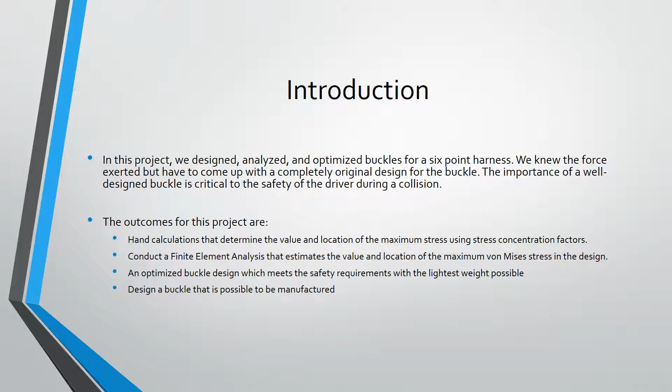These are the assumptions we made when designing our buckle. The forces are at the slot of the buckle and at the hole of the buckle in the opposite direction. The force is distributed equally to each buckle in the harness. The applied force is in tension uniaxially.

The buckle material is uniform throughout, or homogeneous. The material of the buckle is assumed to be brittle for hand calculations. The buckle does not experience any moments. The buckle is secured on both of its sides. The fillets on the buckle edges do not affect the stress distribution of the buckle, and the temperature is assumed to be ambient.

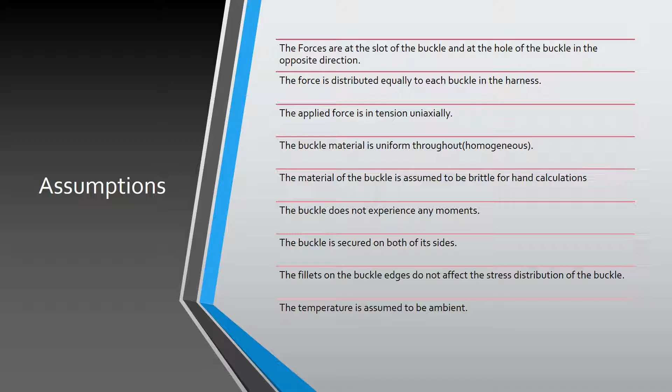This is our free body diagram. On the left, we have the force lines that go throughout our buckle design, and on the right, we have the initial dimensions that we have for our buckle.

It has a width of 2 inches, a height of 2 inches, and the hole towards the bottom has a diameter of 0.5 inches. The height of the slot is 0.5 inches and the width of the slot is 1 inch. We assume the thickness of the buckle to be 1/4 of an inch.

For our knowns, we know the dimensions because we assumed them. We know the material properties. We know the weight of the man was 200 pounds and the force he felt was 100 gravities. We know that the gravitational constant is 32.2 feet per second squared. And we knew the ultimate tensile strength was 138,000 psi, and as previously stated, the thickness was 1/4 inch.

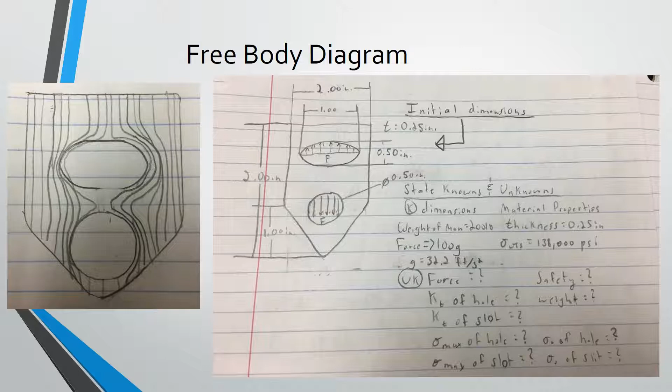Our unknowns were the force that was exerted on the buckle, the KT of the hole, the KT of the slot, the nominal stress of the hole, the nominal stress of the slot, the max stress of the hole, the max stress of the slot, the safety factor of our design, and the weight of the design.

These are the KT charts we used with our initial dimensions. On the left was for the hole, and on the right was for the slot.

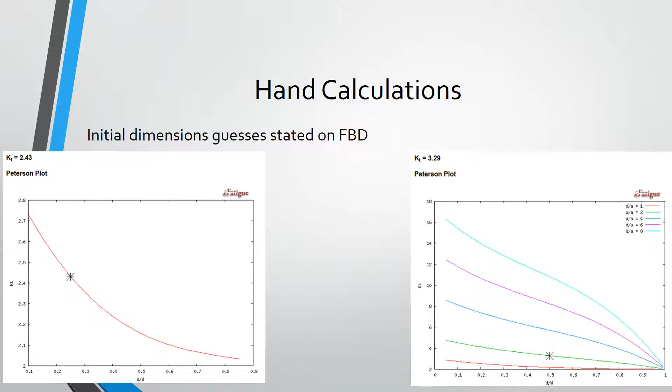These are the calculations we used. For equation 4, that was used to determine KT for the hole, and equation 8 was used to determine the KT of the slot. Equation 4 was also used to determine the slot.

On the right, those are areas of a rectangle, circle, ellipse, and triangle, and total area, so that we were able to determine the weight of the buckle.

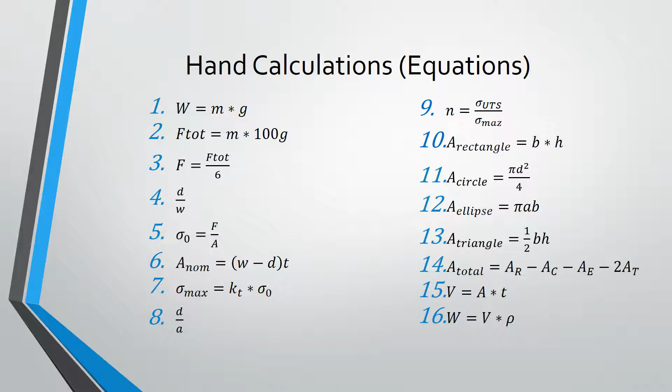For equations 1, 2, and 3, we used those to determine the force that would go to the buckle.

These are our hand calculations. The first step was to determine the force. We determined that the force was 200 pounds multiplied by 100 gravities, and we were able to divide that by the 6 buckles in the harness, so we were able to get a value of 3,333.33 pound force repeating. Next, we determined the max stress at the hole.

First we determined the KT value from the charts. Then we determined the nominal stress and used the area equation from the KT diagram. From there we got our final answer for the max stress at the hole.

Next, we determined the max stress at the slot, and we assumed the plate was an elliptic symmetric hole. We used the same equations from earlier for area and the same equation from earlier for the nominal stress, and then from that we determined our max stress.

Since this max stress was higher than the stress at the hole, this would be the max stress of the system. Then we determined the safety factor by dividing our ultimate tensile strength by our max stress, and we got a safety factor of 3.1, which is greater than 1.5.

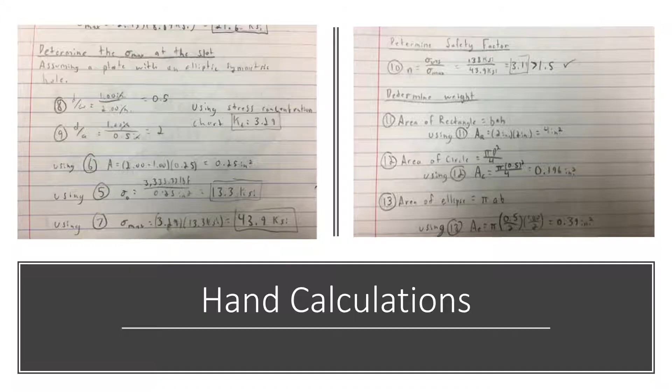Then we determined the weight by calculating the area of the buckle, and after we determined the total area, we multiplied it by the thickness to determine the volume, and then we multiplied that volume by the density of the material to determine the weight, which ended up being 0.096 pounds.

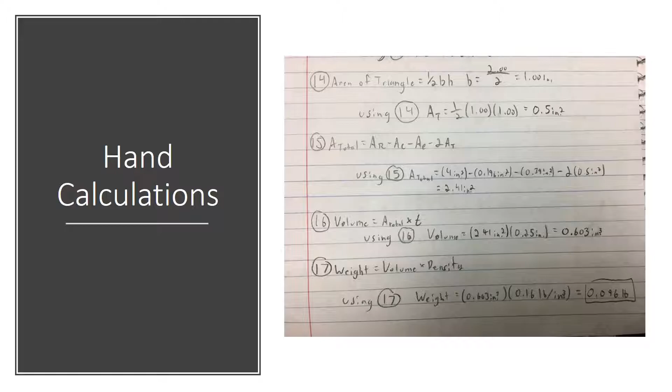To optimize the width and thickness of the buckle, we use the equations provided in the course website and plug them into Mathematica to simultaneously solve 7 equations and get the most optimized width and thickness.

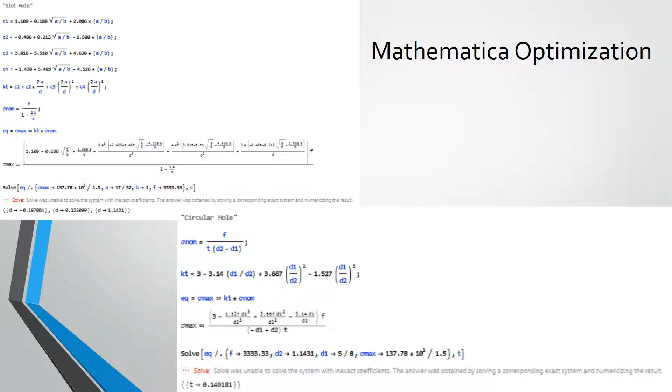The width of the buckle should be 1.14 inches, about 1 3/16, and the thickness should be 0.149 inches, about 3/16. After trial and error using standardized IPS dimensions, we modified our design to meet the safety factor and optimize it to the lightest weight possible.

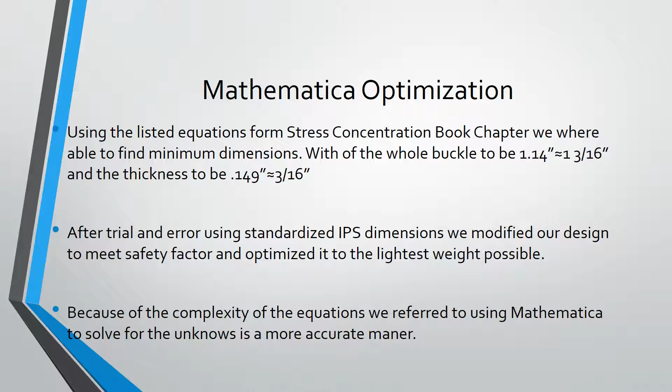Because of the complexity of the equations, we used Mathematica to solve for the unknowns in a more accurate manner. These are the graphs we found for KT using the optimized dimensions. The left is for the hole and the right is for the slot.

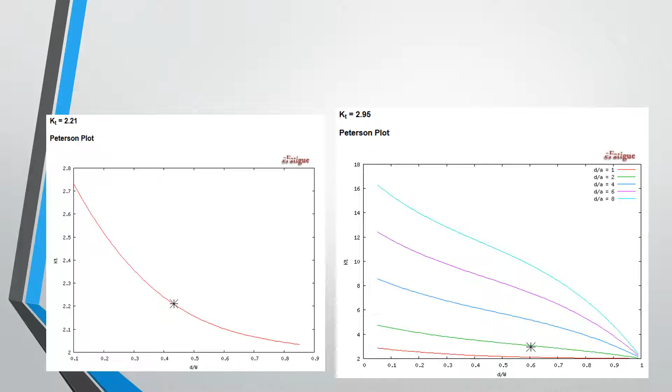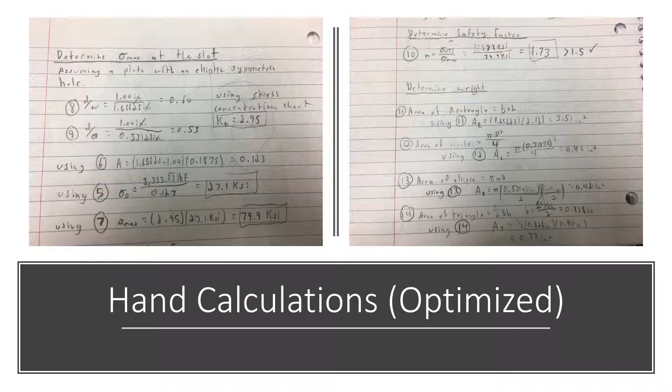Next, we determined the max stress at the slot, assuming a plate with an elliptic symmetric hole. We used the KT calculations given with the diagram for D over W and D over A, then determined the KT through the stress concentration chart. Using the same area and nominal stress equations as before, we found the max stress to be 79.9 KSI. Since this stress was higher than the stress at the hole, it is our max stress for the system.

Next, we determined the safety factor by dividing the ultimate tensile stress by our max stress, and found our safety factor to be 1.73, which is greater than 1.5.

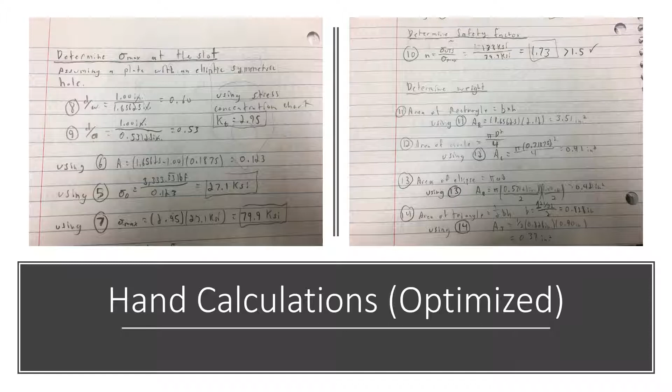Next, we determined our weight, first by calculating the area of our buckle. We added the areas to determine the total area, then multiplied it by our thickness, now 0.1875 inches, and multiplied the volume by our density, finding that our buckle weighed 0.058 pounds.

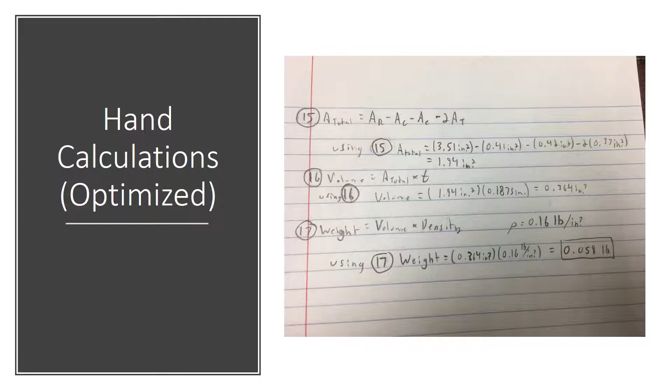After trial and error, this was the final dimensions for the most optimized buckle we could create.

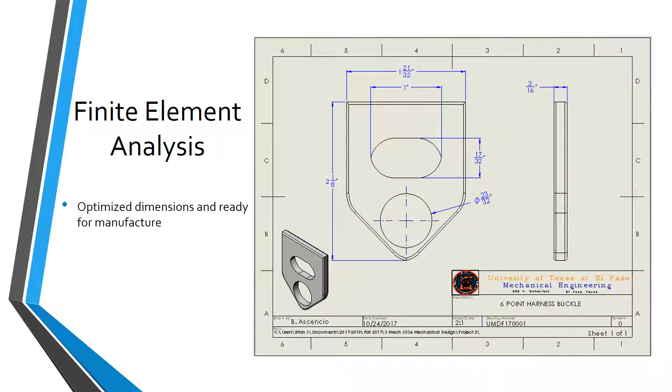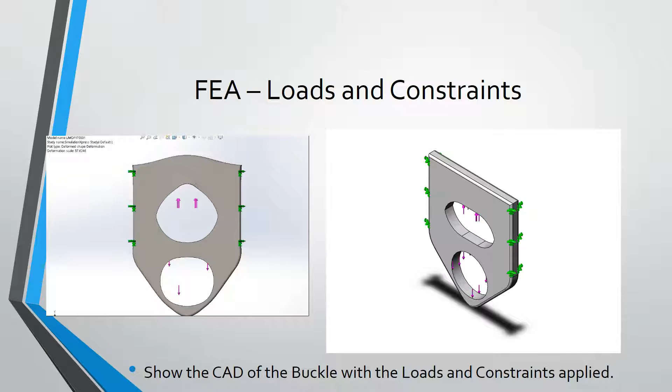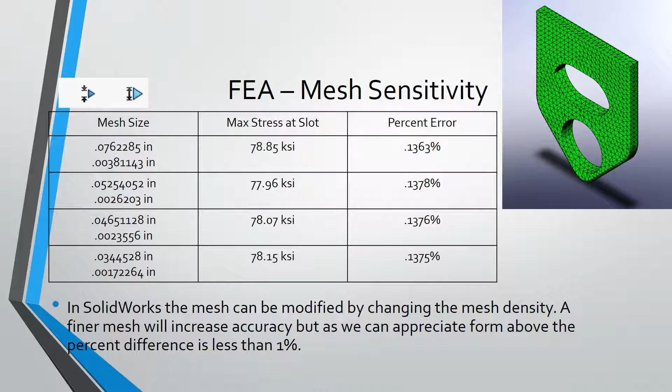Here we can see the heat map of the von Mises stress, with the max being 79.1 KSI and the min being 263 PSI.

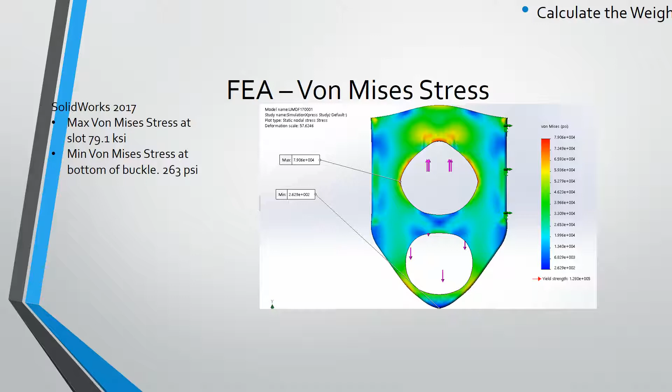As we assumed, where the larger discontinuities were, the larger the stress was. Comparing the FEA von Mises stress to the hand calculations, there was not a lot of percent error, and due to the simple geometry of our design, the values had a max error of 18.2%, making the hand calculations extremely accurate.

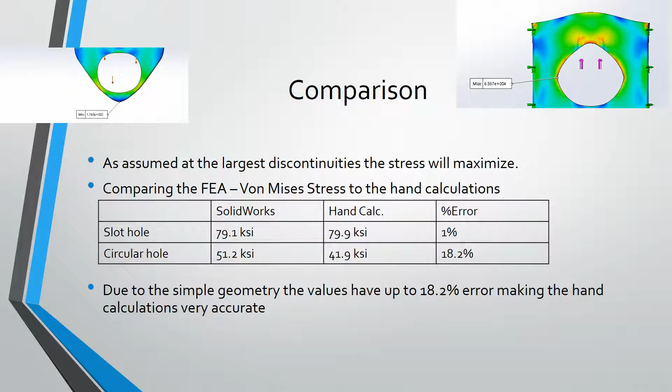Approximately, titanium costs $18.80 per pound. Already manufactured, it would cost $11.52 per piece.

Coming up with a practical, manufacturable design that could also withstand the force was the biggest challenge we faced during the design, as well as optimizing it to be as efficient and lightweight as possible. We first started with dimensions we believed would work, then optimized our design in relation to the provided equations. We then compared the FEAs of the various designs and chose the most efficient.

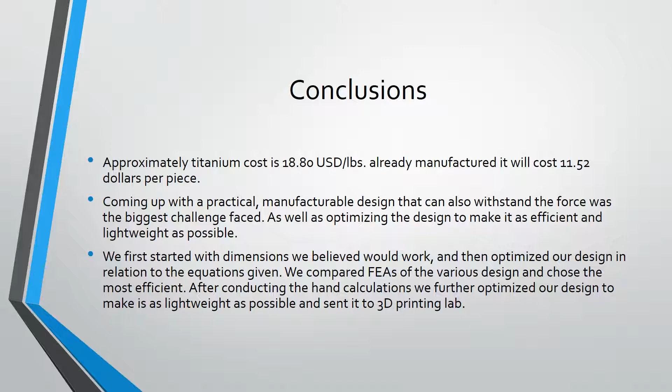After conducting the hand calculations, we further optimized our design to make it as lightweight as possible, and then sent it to the 3D printing lab.

SolidWorks has an optimization feature. After viewing and reviewing the results, you will be asked if you would like to optimize your model.

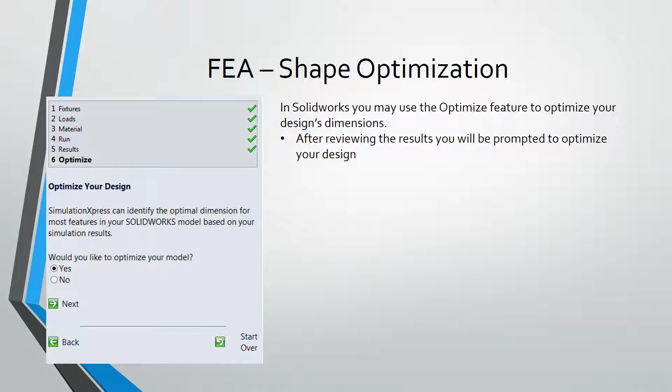First, you must select the dimension you want to optimize. Then you can add a constraint, which can be the safety factor, the max stress, or the max displacement. Then add a goal, which can be minimizing the mass.

After that, SolidWorks will run several simulations and select the most optimized option depending on your goals and your constraints.